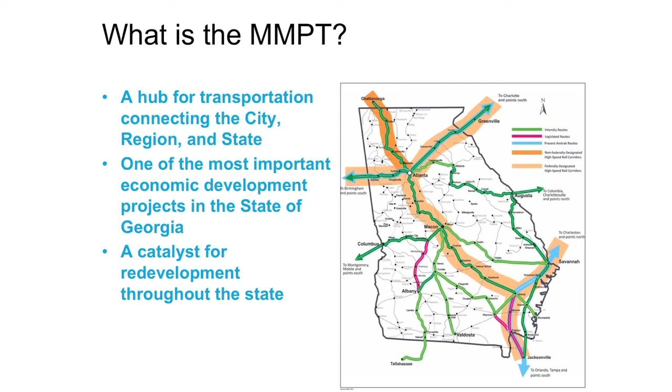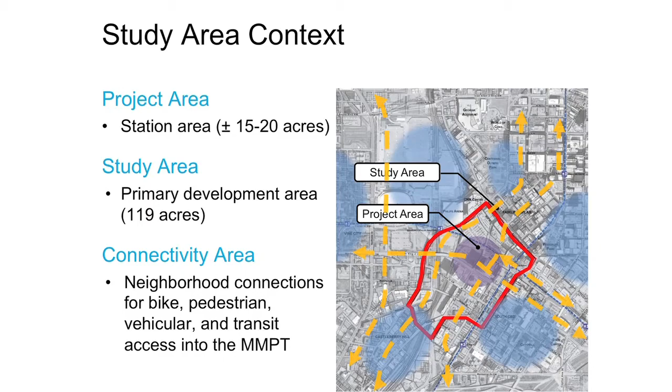The station itself, which we call the project area, sits in the middle, about 15 to 20 acres. The red area identifies 119 acres around the project. This is really about connecting the neighborhoods for bike, pedestrian, vehicle, and transit access to the MMPT.

It's really a public-private partnership with GDOT. The one thing I think is important about this project is that all the master developers don't have a stake in the game. In other words, we don't have equity into this, so our goal is to really look out for the stakeholders and work with the public to come up with the best project that we can.

So it's an agreement between us, a government agency, and a private business to expedite jobs and make them happen quicker. Some of the advantages that come out of this is that the NEPA process, for example, can take up to 5 years. Because of the relationship we've had, we're going to be able to cut that process down to less than 2 years. Timing kills deals, and it's a good thing to move projects along. So we see this project moving along very quickly.

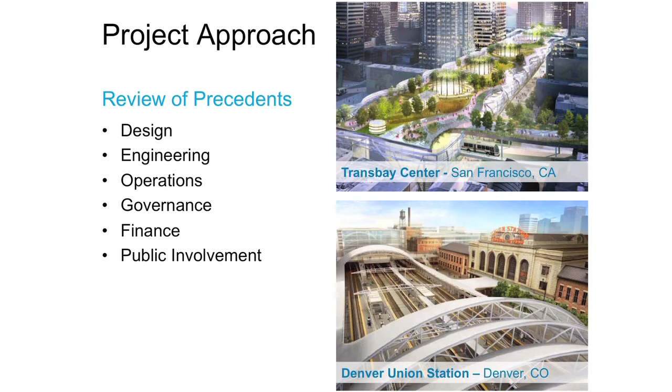In order to start this project, we actually went out and did a study of all the stations we could find that related to this project. We looked at design, engineering, operations, governance structures, finance structures, and public involvement—how do we deal with the public, the stakeholders, and everybody else? To do that, we made sure we hired what we think is one of the best firms around, Urban Collage. With that, I'm going to turn it back over to Dennis to tell you about some of his stuff.

I want to give a little bit of background. I know some folks have seen this before. I want to talk about the history, mainly because what we want to communicate is that we're not reinventing a wheel. We are not trying to put something in place in Atlanta that has never happened before—there is a history of rail, not just freight rail, but also passenger rail in Atlanta. Most folks realize the nexus of 3 rail lines was the genesis of Atlanta. It's how you got the great colliding street grids.

But what a lot of folks don't realize, unless you're a real fan of preservation or old photographs, is how many streetcars there were and how much passenger rail was involved as well. That went on for quite some time. We even had large historic terminals that we don't have anymore. This was really a rail city in every sense of the word—freight, passenger, streetcar. It was connected by transit. It was very well plugged in.

But from 1900, a little later on, as the automobile began to come into more prominence, our rail heritage from the passenger side started to get whittled away and peeled back. The freight rail obviously remained and flourished, but the passenger side started to disappear. So we're looking at ways to reestablish that.

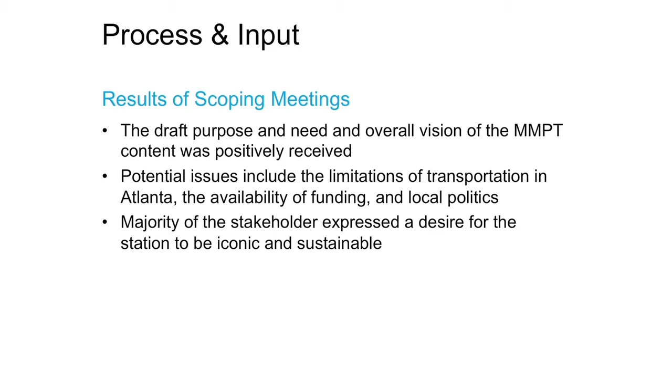As far as the station itself goes, most folks had a very consistent comment. They wanted it to be iconic, something big, something visible, something you could have a postcard of. And they wanted it to be sustainable, from a variety of standpoints, whether energy efficiency or something that enhanced the overall transportation network and encouraged transportation sustainability within Atlanta and throughout the state of Georgia.

From all that we've heard, all the studying we've done, and all the existing conditions we've looked at, there are really a series of planning goals we want to get. Whatever happens out of this, there are certain things we want to address. The folks who follow me, the technical folks who have the expertise in designing stations, rail, and surface transportation, are going to talk about these in more detail.

Rob Ross is going to be first. He's with Kimley Horn and knows surface transportation very well. He'll talk about the buses and pedestrians and how this all connects, not just within the study area but beyond it. We know there are connections that have to be dealt with into the MMPT study area, not just within it. He'll talk about enhancing and promoting the bus experience, creating a great pedestrian environment, and weaving connections both north to south and east to west so that you don't have this literal gulch anymore—you have a re-knitted fabric within downtown.

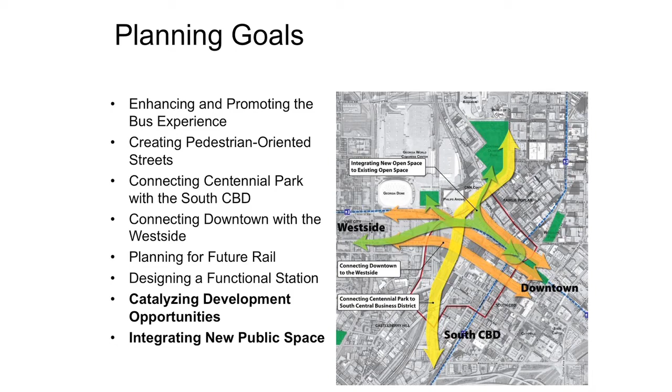Ed Campbell of Parsons Brinckerhoff is going to follow him. He'll talk more about the technical details of the rail, how we plan for future rail—not just passenger, but also freight, all forms of rail—and what goes into designing a functional station. He'll be followed by the architect John Schuyler, who's with us, who's going to talk about what these alternatives look like, how they catalyze development opportunities, and how we integrate new public space.

So with that, I'm going to turn it over to Rob Ross, who's going to talk with you about surface transportation and access. Again, Rob Ross with Kimley Horn. We're responsible for the surface transportation around the site and the infrastructure surrounding the project area. One of the first things we wanted to look at for the design of the MMPT is how the buses are going to get to and from the station itself. There are going to be a lot of buses that access this.

Gwinnett County Transit, GRTA, Cobb County Transit all have significant bus ridership into downtown and want to make sure they can get here easily. We see the interstates are obviously the best access from those places far away, particularly the HOV lanes, since these buses are going to want that quick HOV access to downtown.

There's a lot of ways to get to downtown from the region. Some of the interchanges are better than others. I'm sure all of y'all have your own opinion on the best way to get downtown, and we've found that during this process. Some of the roads and connections are better than others, but they don't always match up.

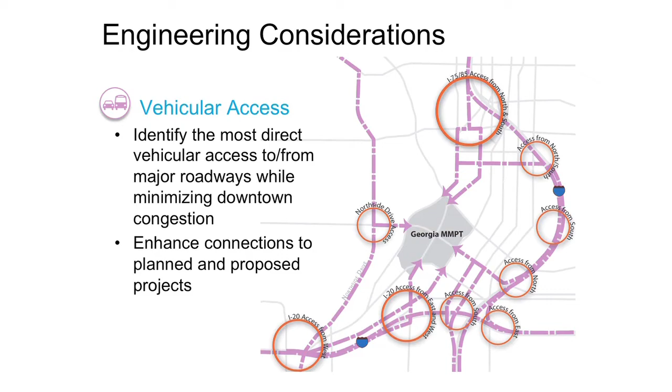One of the things we wanted to make sure we did was design a flexible site, a station with multiple access points that can change over time as GDOT comes in and implements managed lanes on I-20 or through the connector. This terminal station itself can change with that.

Buses are very important, but cars are going to be important as well. One of the goals of this is to get more people to ride transit, but not everybody is going to have access to transit, not everybody can ride it, not everybody's going to choose to ride it. So we want to make sure that cars can get to and from the station as well.

There's going to be a significant amount of overbuild. There's development that's going to occur near the station. Jim mentioned earlier the public-private partnership—that development is going to help pay for the station. So we want to make it an attractive development near here as well, so those folks who choose to drive can drive as well.

There's a lot of parking on this site today, and a lot of that parking is going to be impacted. Previous studies have shown there's an oversupply of parking, so we're probably not going to rebuild every space that's impacted, but we do want to make sure the people who choose to drive are going to have a place to park.

Grid connections: the Gulch is a hole right now. It's not an easy place to get around. Improving the east-west connectivity across the site is important.

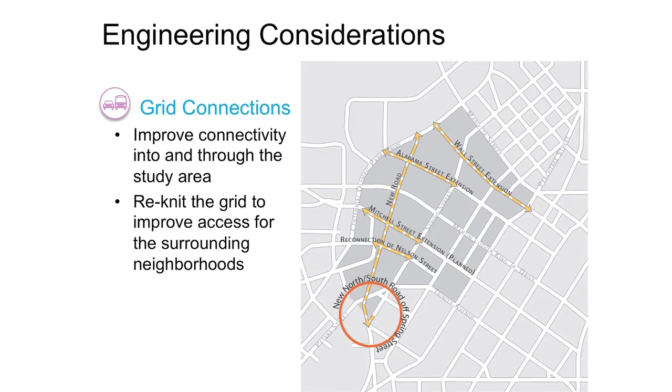We've introduced two new east-west connections, Wall Street and Alabama Street, on the north side of the site, and we've also added a new north-south connection. A lot of folks experience congestion on Spring Street on the south end of the site—that's congested almost every day, and with future development that would get worse. So we're proposing a new north-south connection parallel to Spring Street to relieve that, and also to break up those blocks, because the blocks down here are pretty big and make it hard to get around.

Pedestrian and bike connectivity—can't emphasize enough how important pedestrian and bike access is to this. It's transit: when people get off the transit here or get on the transit, they're going to have to walk or get on their bike. That's how they're going to get to their destination. So we want to make sure that it's easy to get around.

With the improved grid network, we're going to make all of these streets complete streets. We want to make them all very attractive for pedestrians and for bikes, but we don't want them congested with cars either.

The pedestrian connection is important for the development and for that TOD, the transit-oriented development. It's also important to make a good connection to Five Points, since we might not be directly connected with Five Points—we may have to walk a little bit to get there. So we want to make it a very attractive, short connection for those pedestrians.

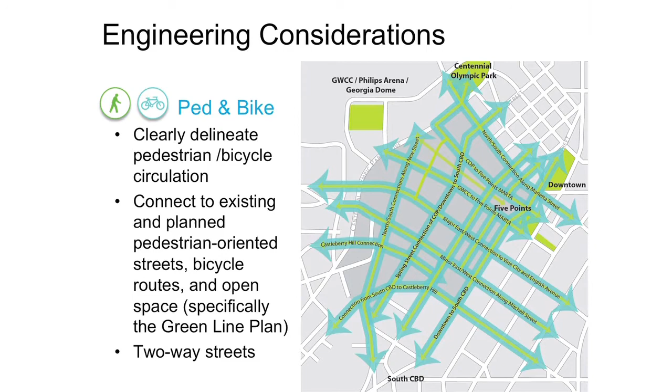And then lastly, we want to have good connections with the event space—Philips Arena, the World Congress Center, the Georgia Dome. We want good pedestrian connectivity there to encourage those folks, when they come downtown for an event, to use this station, to use the transit, and increase that transit ridership.

Next, Ed Campbell's going to speak with Parsons Brinckerhoff. They've got over 100 years of transit experience, a lot of rail and programming.

Okay, Rob talked about access to the MMPT. Let's talk a little bit about the MMPT and the program overall, and how to integrate all those different modes that are shown at the bottom of the slide.

It's really about the experience of the passenger. As you come to the MMPT, whether a loved one drops you off at a kiss-and-ride, whether you ride by streetcar, pick up a ride to the airport, go to one of the development venues that may be integrated into the station, or grab MARTA—either on a commute or during intercity travel—it's about the functionality of the entire station and integrating that experience, so that the time you depart or debark from one of your transit vehicles, your interconnection to the other mode of transportation is very efficient and comfortable.

So let's talk about the individual components that are within the MMPT. And the first one we're going to talk about is freight rail.

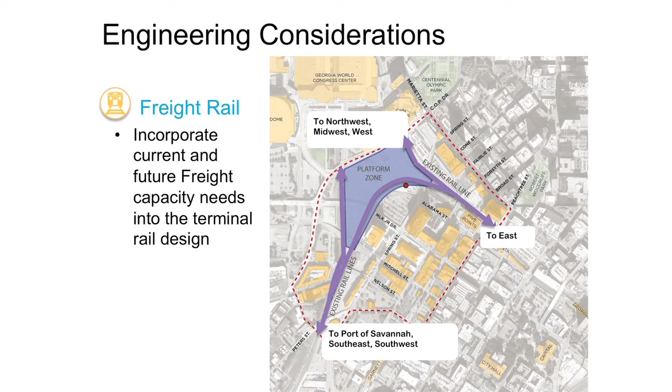The State of Georgia views and recognizes the economic benefit of freight rail. Consider the investment in the port in Savannah, and also think about our own selves, our clothing, the products we buy, the raw materials that lay the basis for the electricity you see in this building and in our homes. Freight is an important part of economic development.

The MMPT station site is located right in the middle of active freight lines. Our project approach provides a clear path for freight through the site to ensure not only efficient movement, long-term efficient movement of freight, but also to respect the growth anticipated not only from population growth in the Southeast, but the resulting growth of freight. So freight is segregated from any aspect of the MMPT station, but focused on that long-term efficient delivery in terms of anticipated increases.

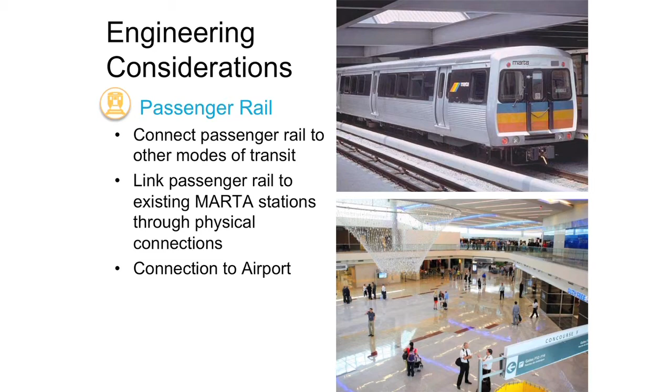Passenger rail. Georgia has underway several feasibility studies, as well as advancing into some environmental reviews of passenger rail. The MMPT has 5 platforms. The site is actually maxed out with 5 platforms to accommodate those passenger rail services should they occur in the future.

The entire focus of the station, as you'll see in the concepts that follow, is generally located between the MARTA 5-Points station, a major hub of the MARTA network providing access north-south and east-west. It's important to have direct connectivity. The MMPT will have direct connectivity to MARTA's 5-Points station, but also the Georgia Dome station to the west.

And finally, when it comes to the airport, when you arrive at the MMPT you'll have multiple options, whether it's by bus, by MARTA, by shuttle, by taxi, or even potentially passenger rail in the future, to access the international and domestic terminals of the airport.

The MMPT project is also going to be integrated with the streetcar. Currently, the City of Atlanta is underway with the implementation of a streetcar network. We're coordinating with the Atlanta BeltLine, who has responsibility for that implementation.

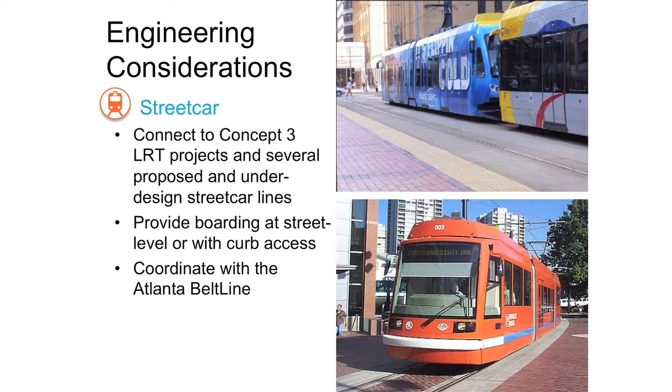Streetcars provide that last-mile connectivity, somewhat like a moving sidewalk, that gets you to your final destination, whether you're arriving at the terminal or the multimodal passenger station and going to a business, your residence, a hotel, or a restaurant. The MMPT will have platforms, and because of the activity we anticipate, the platforms will accommodate several streetcars at one time with level boarding and curb access.

Buses, and boy, do we have lots of buses at the MMPT. When you look at Atlanta, our principal mode of transportation besides the MARTA heavy rail line is bus. We anticipate long-term growth of bus requiring roughly 80 bays within the facility.

Think about that in terms of the number of buses it takes off the local street grid—you're talking about hundreds of buses. Those that will use the MMPT include local MARTA buses, regional express commuter buses from the various counties and GRTA, intercity buses which are currently growing somewhat explosively, future BRT bus rapid transit with articulated vehicle designs, and some current buses today are double-decker buses that serve intercity routes.

The point here is that the MMPT is poised for growth within the bus network, and I might also mention the charter bus functions could also access and use the facility.

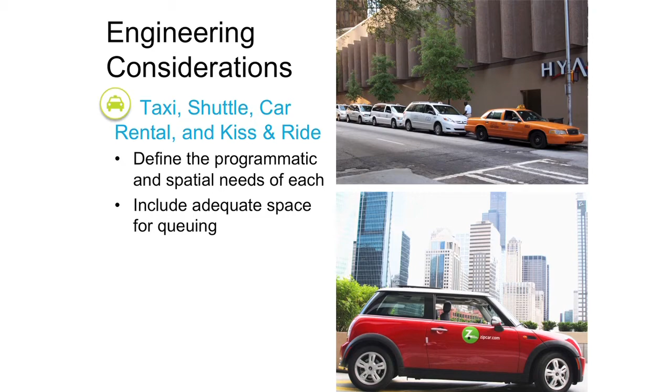Also key for any station is the ability to drop off quickly a loved one, either via kiss-and-ride, a shuttle to interface with the station to take you to the central business district and/or hotel, and of course taxis. The MMPT station has adequate queuing for all those different local modes of transportation. In addition, car rental will be available within and integrated into the station.

Pedestrian bike access - Rob talked about how important pedestrian flow is to the station. The station concepts ensure that grid, with east-west flow through the station as well as north-south flow through the station.

In addition, bicycles will be provided with facilities not only to store bikes, but potentially rent bikes and repair bikes. The key to all of these modes of transportation serving the MMPT, and the customer experience through the station, is that the MMPT is an accessible design meeting ADA requirements, whether it's a mode or the station itself.

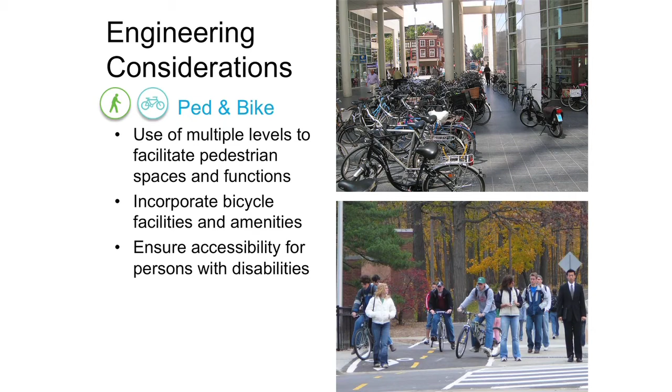With this, I'd like to pass it on to John Schuyler, who will present the alternatives. Before we get into the actual details of the design, we'd like to give you a brief tour of some of the qualities that we think constitute a great transportation center, and a very brief tour of the site itself to give you a sense of the context.

So we want to talk to you about the great qualities of a transportation center to give you a sense of the tremendous opportunity that this project has. I think by looking at these images, you'll get a sense about the potential here.

Transportation centers are big, complex buildings with very demanding technical requirements. But in addition to meeting the technical requirements, we think the best transportation centers have these qualities in common: a very strong civic presence, clarity and legibility in how they're organized, a great main hall, vibrancy, convenience to use, and last but not least, they're forward-thinking.

I should point out that the qualities we're talking about today are aspirational. We're going to show you some very preliminary images, and these qualities won't be fully realized in those images, but we wanted to give you a sense of where we're heading and share what we're working on.

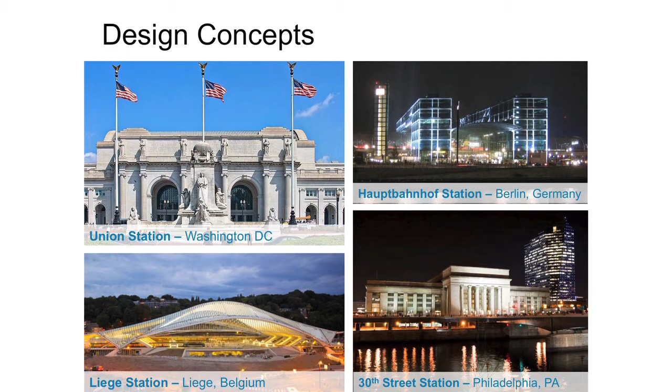Civic presence - these buildings are great transportation centers that all contain a very strong sense of civic presence. They have a very important role in their communities, in the fabric of their cities and their region. They become landmarks.

It's essential for a successful transportation center to have a very simple, clear organization so that it's easy to use for both first-time users and repeat users. It makes them safe and accessible.

The heart of every great transportation center is a main hall. These are great public spaces, rooms that are shared and part of the community. There's a sense of movement, a sense of activity, a sense of arrival.

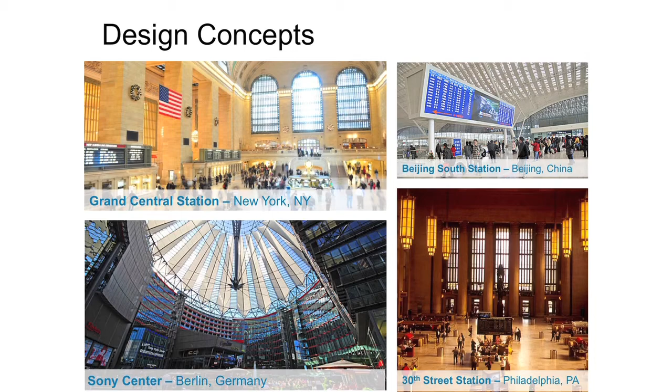It's worth noting that some of the older stations were originally focused primarily on transportation themselves, and they could be great rooms, no doubt about it, but they could be a little static. Over time, these spaces have been renovated and they're much more dynamic. I think what the team is doing is learning lessons from the great older stations and incorporating that into the dynamism of the new contemporary stations.

As I was just mentioning, transportation centers today are not just about transportation. They're also about great activities. They have a lot of retail in them, there's often dining activities, and they become destinations in and of themselves - an extension of the user's daily life and an extension of the community in which they're placed.

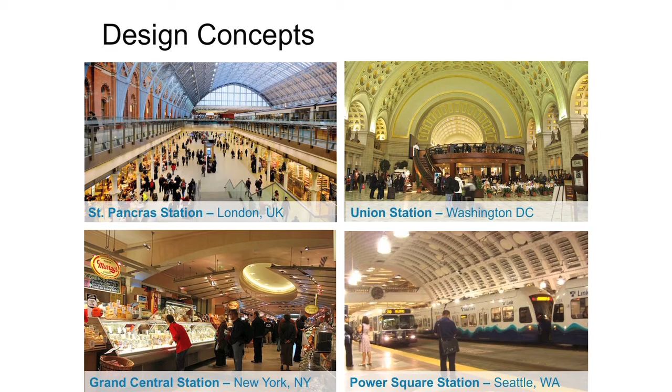The best transportation centers are also forward-thinking. There's an aspirational quality about them. They represent the best of their societies.

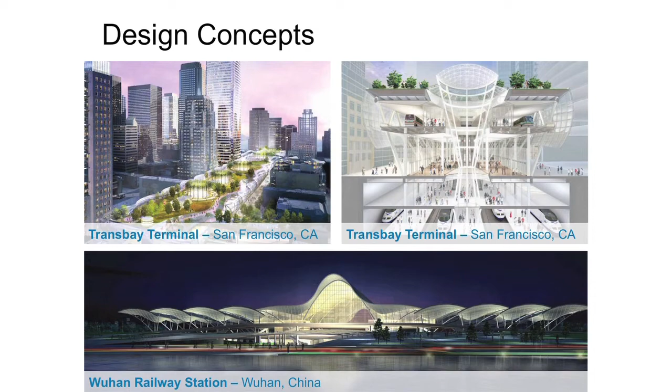All transportation centers are sustainable in that they support the public use of transportation, and they lower our energy consumption. But the best transportation centers today are also high-performance buildings themselves - through their design and engineering, there's often something heroic about these buildings as they look towards the future.

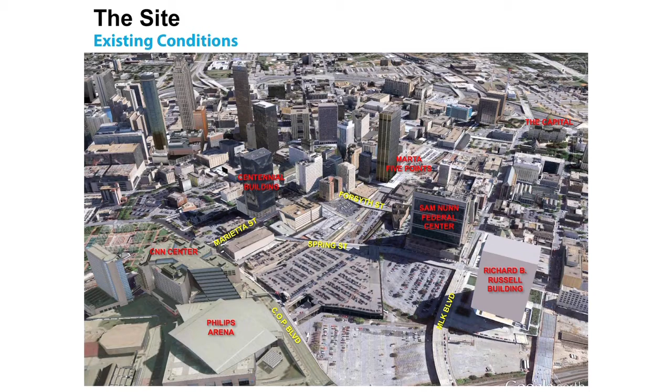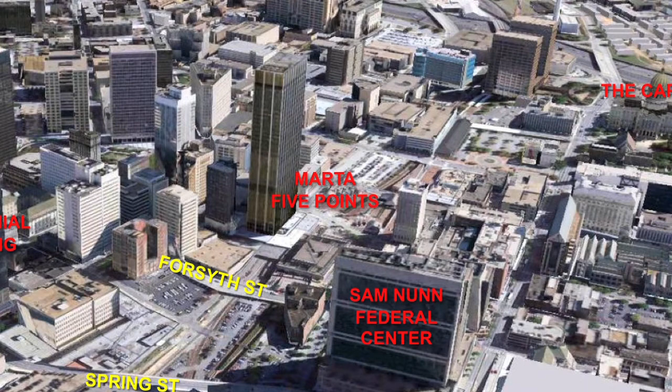So, coming back to our site itself, we're back into Atlanta now. This is an aerial view of our site, and we'll be looking at options that fall in this area right here. Just to help you with orientation, this is the Philips Arena in the foreground, the CNN Center, MARTA 5 Points, the Sam Nunn Federal Center, the Richard Russell Building.

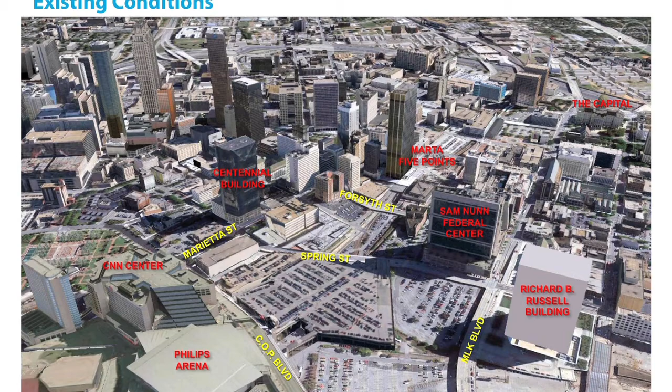This is Centennial Olympic Park Boulevard, this is Spring Street, Forsyth, and Peachtree would just be to the east of MARTA 5 Points, and that's Martin Luther King Jr. Boulevard.

All the options that we're going to be showing you today are really based on combinations of 3 blocks. It's important to understand how we arrived at those 3 blocks.

Ed Campbell was talking about the importance of the rail platforms and where they're going to be located. They're generally in this location. It's important for the station itself to be located immediately above those platforms so that there's direct access to it.

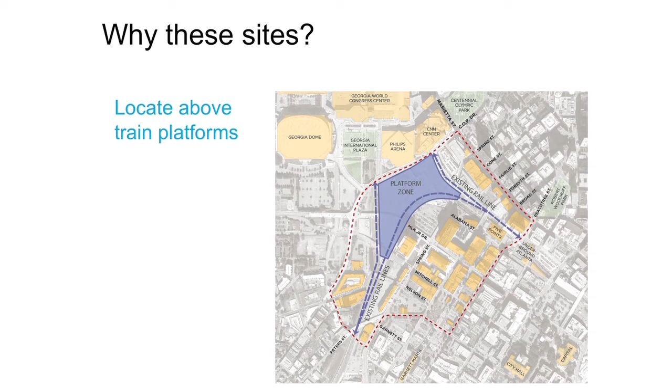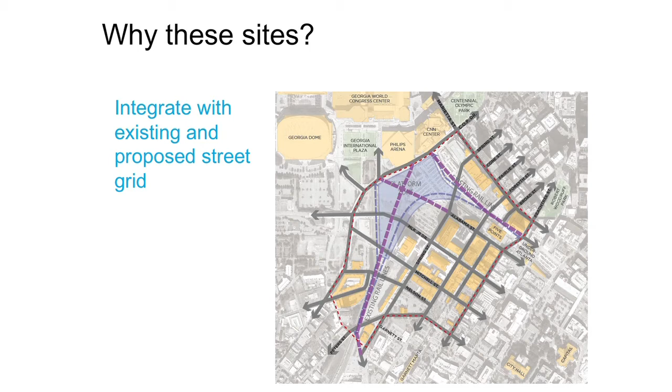Rob Ross was talking about the street network and how important it is for it to integrate with both the existing and the proposed street network. There's an optimum size of block that allows for both pedestrian and vehicular connectivity, and that's generally what's setting this overall street grid.

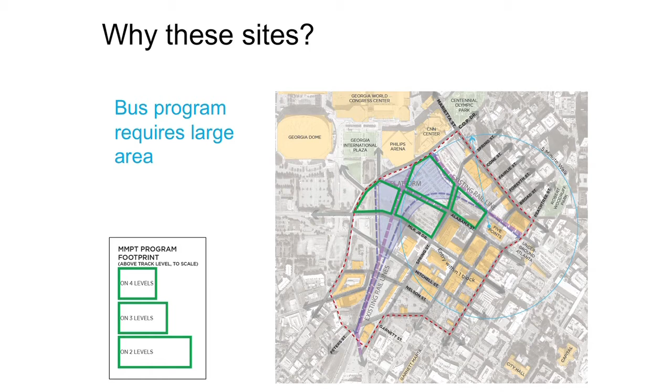One thing that we think is very important is that there be a very close pedestrian connection between the MARTA station and the MMPT. The diagrams on the lower left-hand side of the slide show the footprint of that program in different configurations. This is the entire program on 2 levels, 3 levels, and 4 levels, drawn at the same scale as the site plan. So we'll be looking at various combinations of those blocks to accommodate various combinations of heights and floors of the program.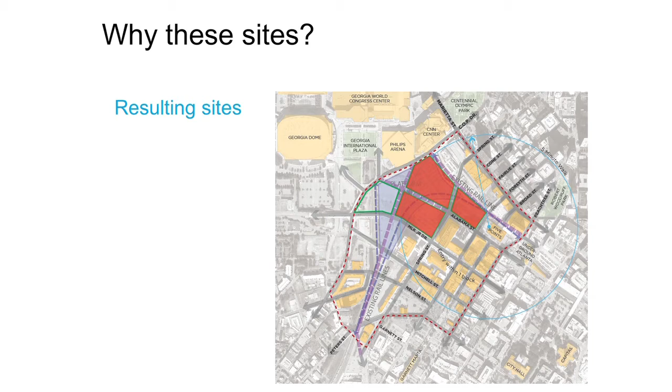When you take all those criteria together, it really yields these 3 blocks, which are going to form the basis for the 3 options that we're going to be looking at in various combinations.

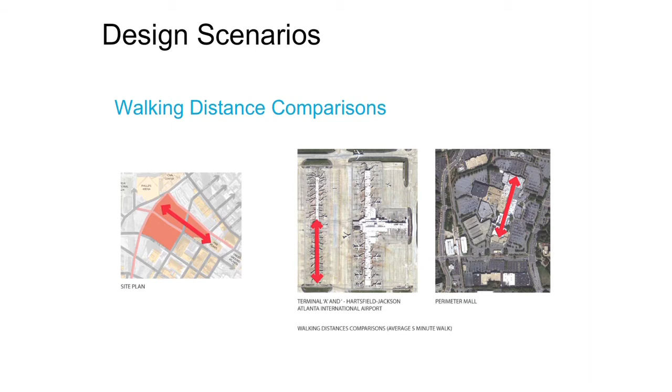I just want to touch again on this issue of walking distance, because it's so important to understand how this feels as you move from MARTA 5 Points to the station itself. For comparison purposes, this is our site, and these are 2 examples you might be familiar with from the local area. This is the site showing MARTA 5 Points with the red arrow, which represents a 5-minute walk across those 3 blocks. This is the Atlanta Airport Terminal with the red arrow, which is the 5-minute walk, on one of the typical terminals - really half of one of the regular terminals at the airport, just to give you a sense of it.

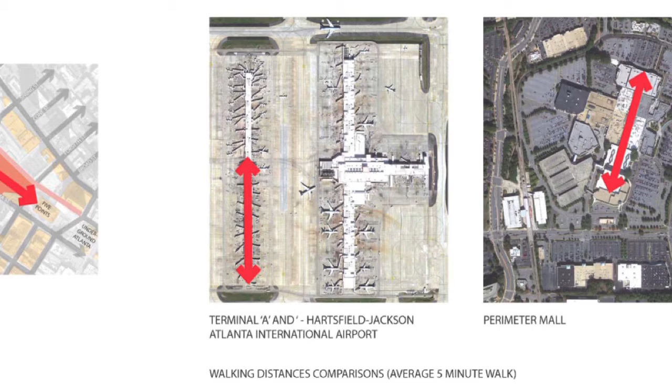This is the Perimeter Mall in Atlanta. Most malls are also about the size, so if you don't know this one, they're all about the same. Generally, what we find is that the distance from the one anchor to the other anchor is about a 5-minute walk.

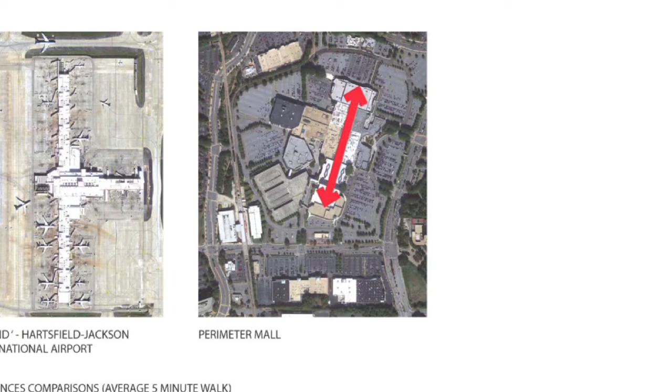Just to recap the overall program, both Rob and Ed talked about the overall program between the buses and the transportation, but in addition, we're going to be talking about the importance of the potential for development above and adjacent to the terminal itself.

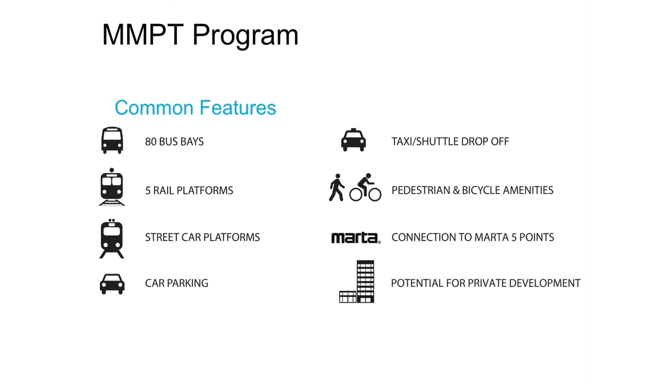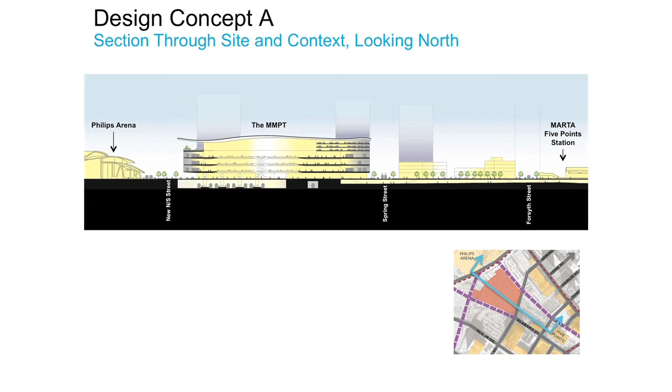This is a section through the site. So if you look at the drawing on the lower right-hand side, this is a site plan. Imagine you were to cut through the site this way, remove this portion of the site, and look to the north.

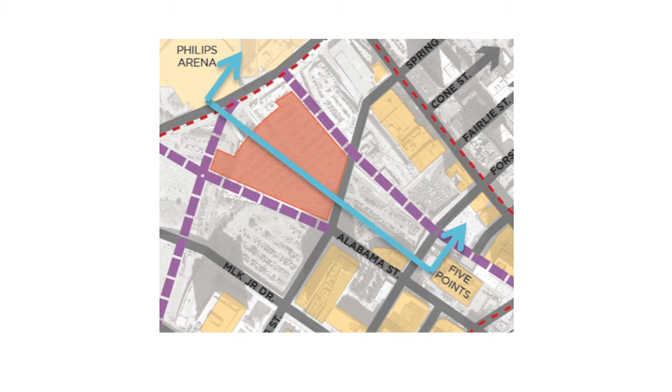What you would see is you'd see the Philips Arena on the left. This is the new North-South Street. This is the main MMPT itself with its main hall. Spring Street, the connecting block, MARTA 5 Point Station.

It's important to point out that there are 2 opportunities for connecting between MARTA 5 Points and the MMPT. There's both a pedestrian connection that can be at street level, or there's the opportunity for a direct connection below street level that would be ADA accessible. There are also many opportunities to bring down additional light and air into that connecting concourse. So there's multiple ways to connect that building.

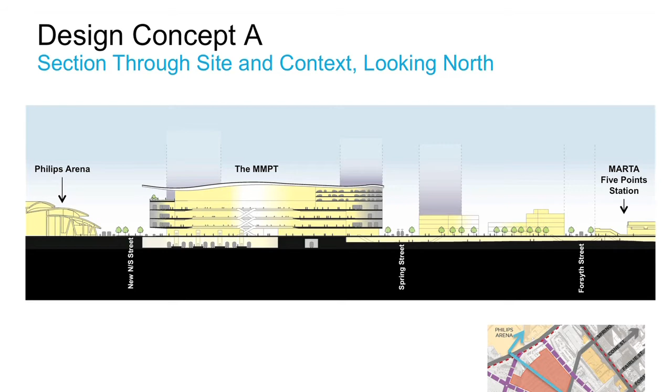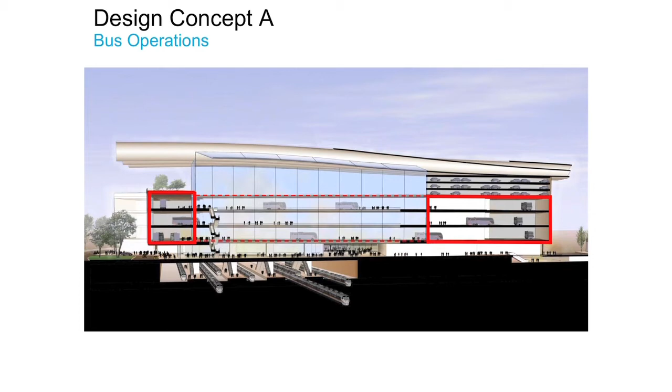A little closer in, this is the main street level and the main hall itself. The passenger rail platforms are below street level. These are 3 levels of bus above the street that are wrapping around, looping around the main hall, and structured parking above that.

Now we're going to show you a little digital fly-through of the site just to give you a sense of the orientation and the scale of the project. These are the existing conditions - again, Philips Arena - existing street network, COP, Centennial Olympic Park Drive, Martin Luther King Jr., and the proposed street grid.

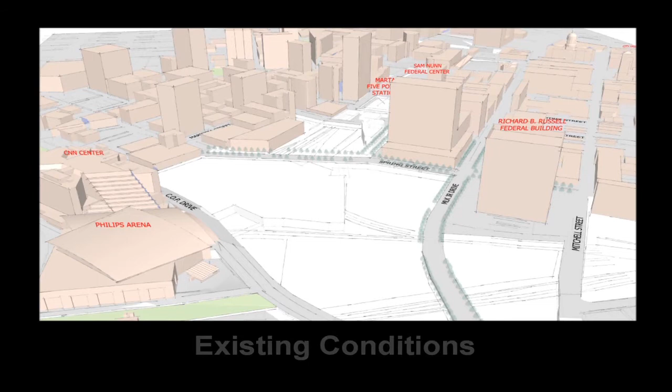This is the new north-south, this is Alabama Extension and Wall Street, and this is the MMPT for Concept A. This is the connecting block, and MARTA 5 Points in the distance.

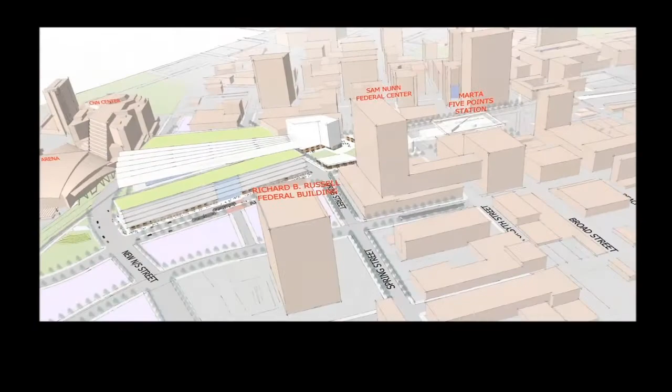This is a view from the east, looking over MARTA 5-Points Station with the connecting block, showing the opportunity for both connection through public open space, through this public and private development, and one can also connect below the street level there.

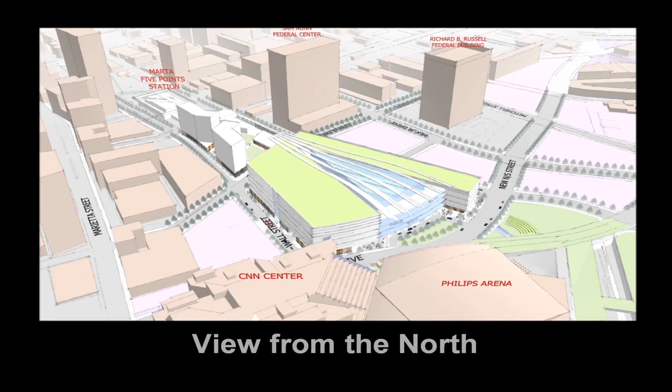Showing the Constitution. This would be the Atlanta Journal-Constitution building, which would be renovated as part of that development block.

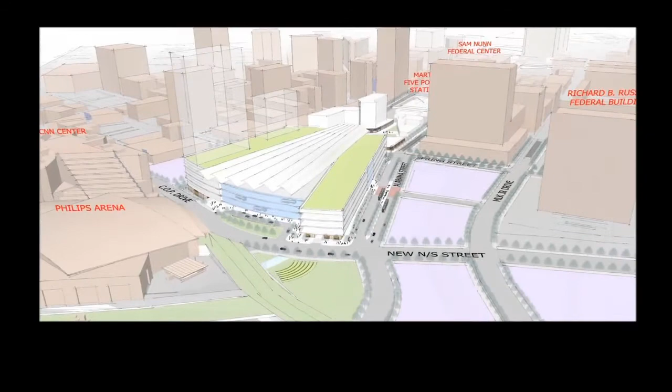This shows the opportunity for some of the potential overbuild and development, details to be worked out. As we get a little closer, this is the front door to the complex, showing the main hall with the buses circulating inside and over the space.

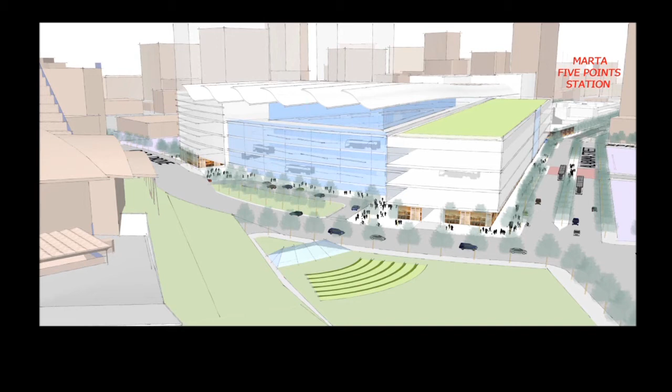This shows the streetcar on Alabama and continuous retail at street level on both Alabama and Wall Street.

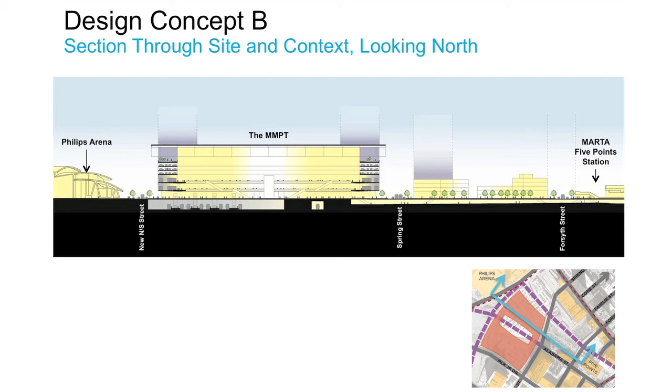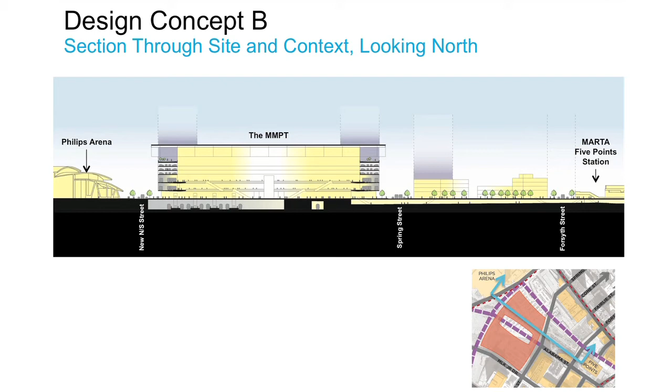Again, the section: if you imagine you were cutting through Alabama, you remove this portion of the site and look to the north, what you would see is Philips Arena on the left, this is the new north-south street, and this is Alabama that we're cutting through with the MMPT, the main hall, the connecting block, and MARTA 5-Points Station. Again, there are two means of connecting for pedestrians between MARTA 5 Points and the MMPT, both above street level and below street level.

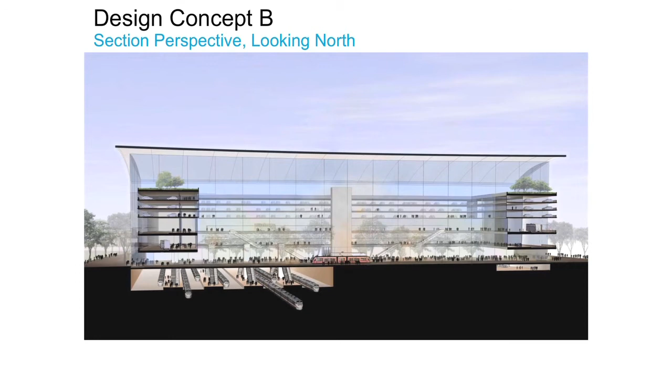A little closer in again. This is Alabama with the streetcar stop in the middle, and this is the main passenger hall behind it, with passenger rail below street level, two levels of bus above looping around behind the two main halls, with structured parking above.

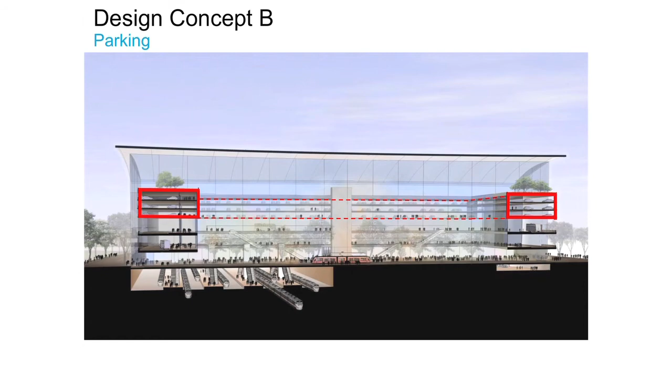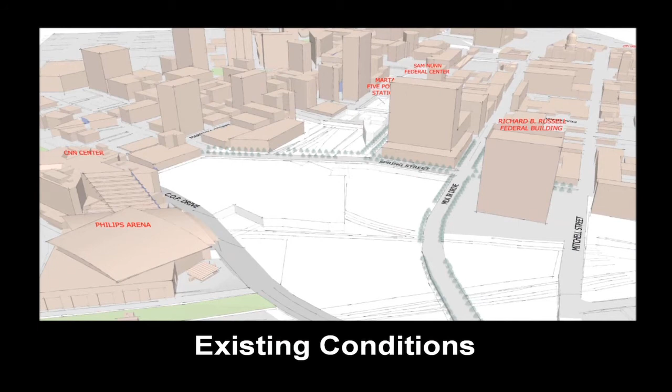Again, existing conditions: Martin Luther King, existing COP, proposed street network. This is Alabama coming through, Wall Street coming through, and the new north-south street.

The MMPT itself on two blocks, embracing Alabama Street with an indoor-outdoor space, the main halls connected to that outdoor space, an extension of it.

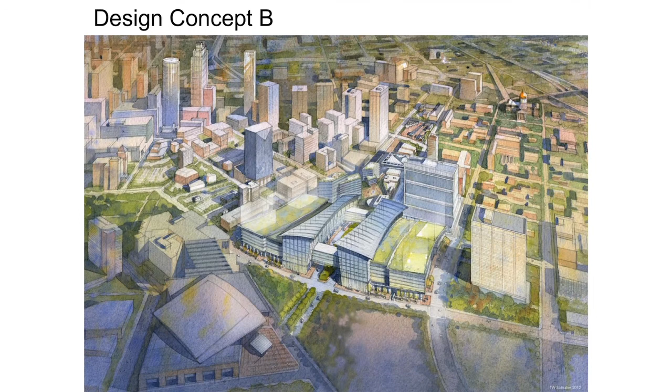I'm probably going to repeat this a couple times, but it's important to underscore again that these are very preliminary images. What's essential here is the fundamental characteristics of the schemes, not the specific details of whether it's glass or not glass, or roof shapes. Those are really secondary considerations at this time and are very likely to change as we work on this over the next couple of months.

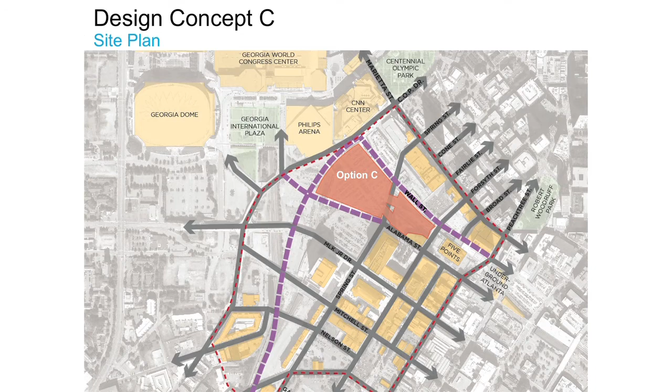So, option C. Option C is a 2-block scheme. It uses the same block that we had for option A, but extends one block to the east, across Spring Street, bringing you right to the front door of MARTA 5 Points Station. So this will have the most direct connection to MARTA 5 Points Station. It's bounded on the north by Wall Street, on the south by Alabama, on the west by the new North-South Street, again Spring, and then on the east side by Forsyth.

The overall concept for this scheme shares some common qualities as Scheme A, in that there is a main hall at the center of this block that is flanked by 2 wings, but that concept is extended to the east, where there is a secondary hall on that block. The buses will be on 1 level above the street, looping around between those 2 blocks.

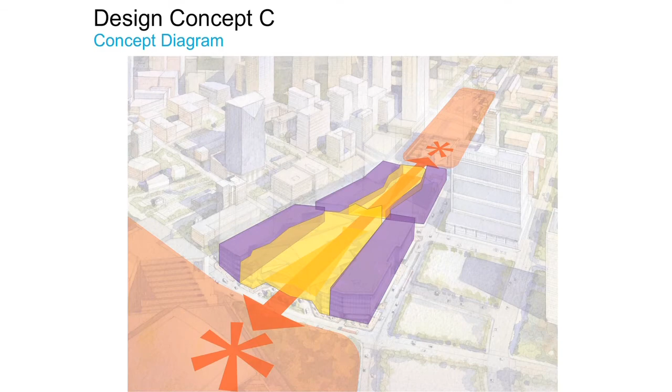There's a continuity of the scheme from the Philips Arena straight through to MARTA 5 Points Station. In this case, we're cutting through 2 blocks, removing this portion and looking to the north. The left side, you'll see the Philips Arena with the new north-south.

This is the western portion. This is Spring Street. This is the eastern portion with its secondary main hall. This is Forsyth. Directly across is MARTA 5 Points Station, again, with opportunities for direct street-level connection between the station and MARTA, and MMPT, and below-grade connection directly into the station.

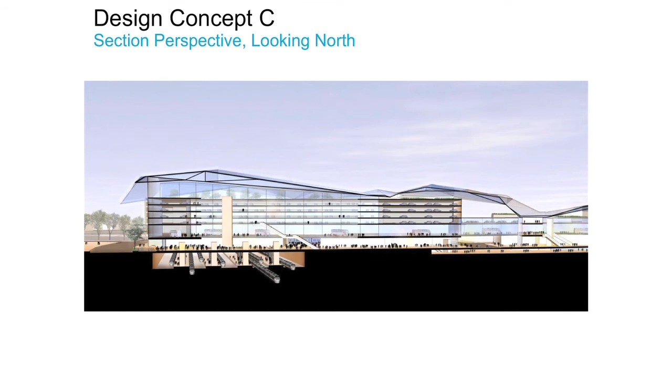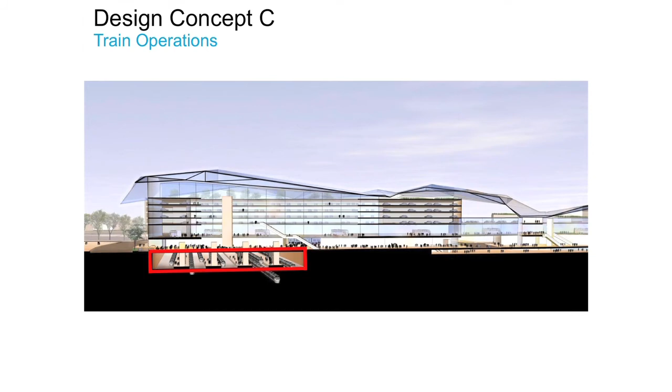A little closer in, the main street level for passengers, the primary hall, the secondary hall, passenger rail platforms below street level, 1 level of bus above street level that's looping around both halls and across both blocks with structured parking above.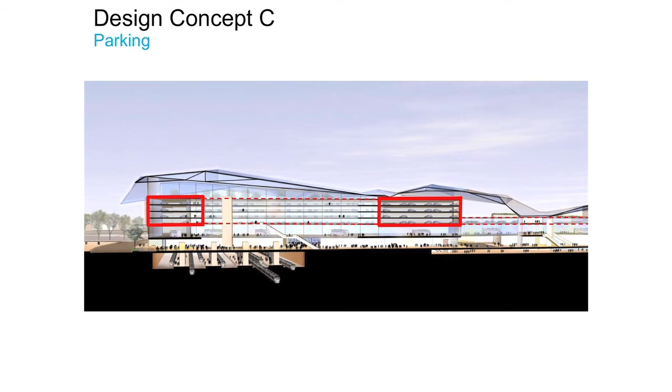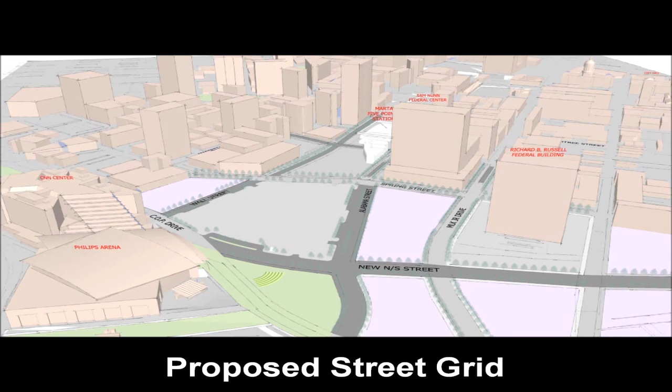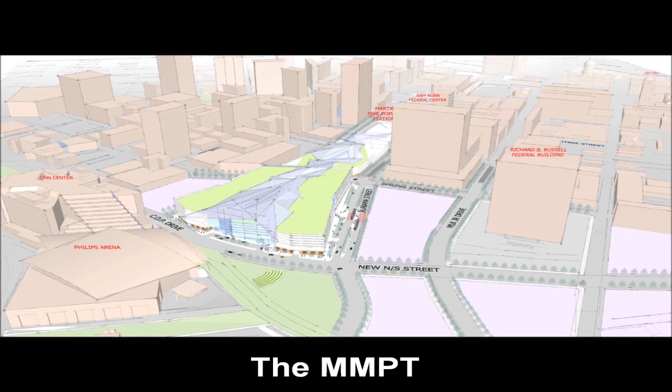So, existing conditions, Martin Luther King, COP. This is the proposed street grid with a new north-south, Alabama, Wall Street, the MMPT across 2 blocks with a main hall that continues across into a secondary hall, direct continuity between the 2 blocks for both buses and passengers.

View from over MARTA 5 Points with the main entrance into the complex directly across the street, across Forsyth from 5 Points, showing the continuity.

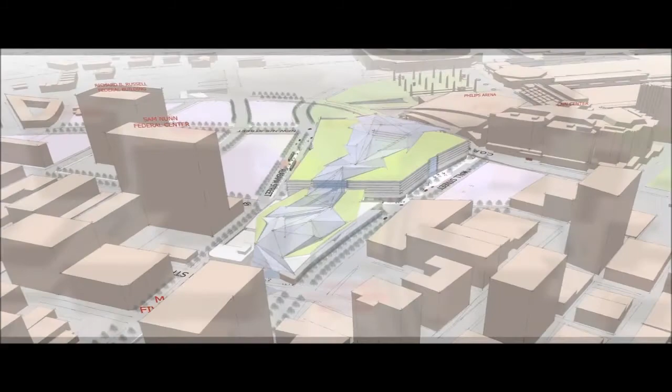There will be multiple access points to each of these stations in addition to their primary entrances. Again, opportunity for potential development above the station.

And as we get a little closer, this is the main entrance into the station, its front door, if you will, with the new north-south, street-level retail, the streetcar located on Alabama, the artist rendering.

So you've now seen the basic images for all 3 of the options. All of these options share many features in common, but there's a couple of things that we should talk about where they really are different from one another.

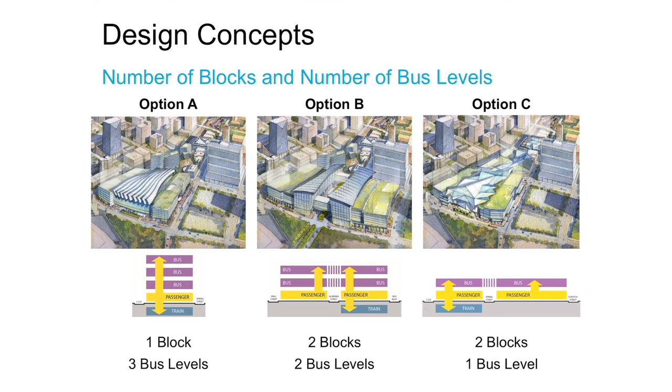So, first and foremost, option A is located on a single block. And it has its central main hall. The buses are on 3 levels above street level in this diagram.

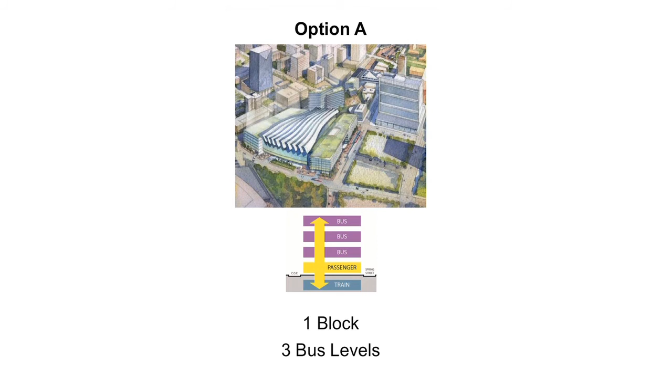Option B is on 2 blocks, straddling and embracing Alabama and coming down to Martin Luther King Jr. Boulevard. There is a central hall that is framed by Alabama and embraces the streetcar. The buses for this scheme are on 2 levels.

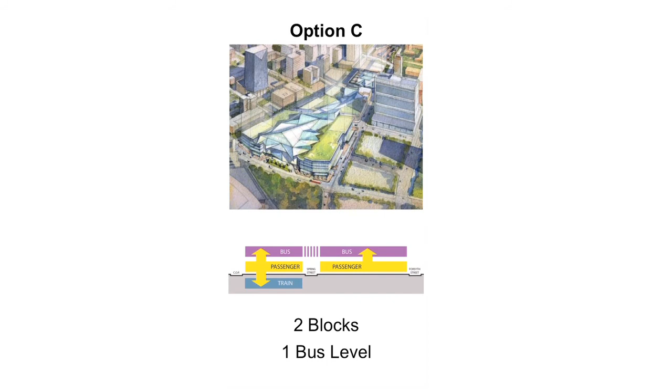Option C is also on 2 blocks, but moving east-west rather than north-south. This block and this block, providing a continuous connection between the Phillips Arena and the activities to the west and MARTA Five Points Station. The buses for this option are located on 1 level.

A couple other differences that are worth mentioning to assist you with understanding the differences between the schemes. So, where are their front doors? In option A, the front door is on Centennial Olympic Park Drive or the new north-south road. On option B, it'll be located on Alabama itself in this area. And in option C, it is also on the new north-south, facing to the west.

Option A is 1 block away, physically, from MARTA Five Points Station. Again, there's opportunities for direct connections below street level and above street level, but the building itself is 1 block away. Option B, likewise, but option C, this is where you're directly across the street from MARTA Five Points Station.

In terms of pedestrian focus, there's 2 options within A on how you can connect for the pedestrians between the east and the west. You can connect mid-block through the complex, or you can use the streets. In option B, the focus there is really much more about Alabama, and it's really supporting the east-west connections. And in option C, similar to A, there is an internal spine, but it's a continuous spine, continuous concourse that'll move from the east to the west.

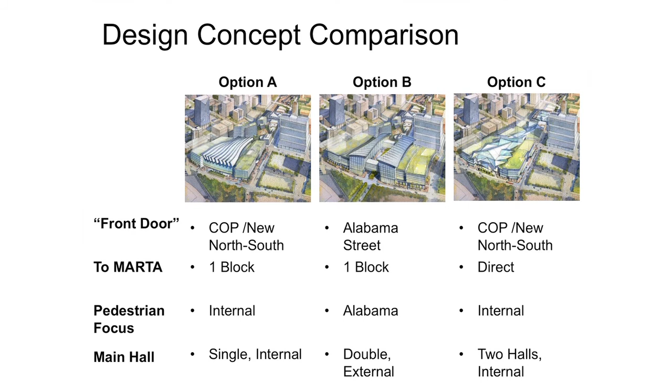There are main hall differences. In option A, it's really a single, internally focused main hall. In option B, there's a double main hall with an external focus on the street itself. And in option C, you're looking at two halls, a primary and a secondary, with a bit more of an internal focus to them. So with that, I've talked about the overall station itself and the basic options.

Now I'm going to hand it back to Jim Richardson, and he's going to talk to you, and Ed Campbell, and they're going to talk a little bit more about some of the opportunities and impacts for the station itself and its relationship to the state of Georgia.

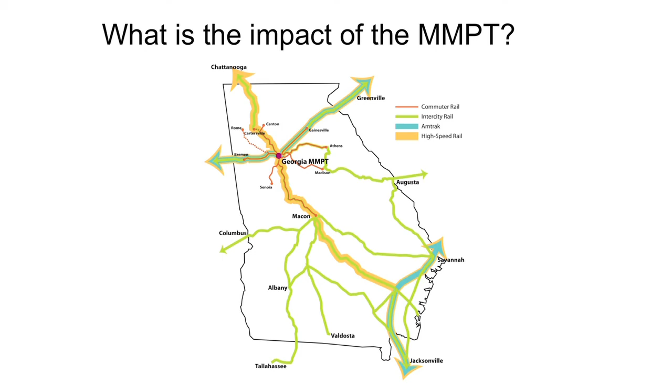One of the important things is once we get this MMPT station built, is how do we connect to Georgia? That's what Ed's going to go through in a minute. But what I'd like to emphasize is the importance of freight. Ed talked earlier about how we're going to work with NS and CSX about coordinating freight through the city of Atlanta without disrupting any of their capacities now and in the future.

That same circumstance occurs at the state level, we have to look outside the state too as we connect and add lines. We're concerned about the capacity of freight in the future and making sure we don't disrupt that across the state. Freight's been an important economic driver for the state of Georgia. We need it and we got to respect it.

One thing I like to share is that for every person out here, there's 70 tons moved per year per person for all of your goods, your clothes and everything else. Over the next 20 years there'll be another 30 to 40 million people, and you multiply that out, that's another 2 to 3 billion tons of freight that needs to be moved. So the freight line capacity needs to stay open. We need to work with them on passenger rail, and I think we're developing those relationships to do that.

And with that, I'm going to let Ed talk about how these are going to connect in the future and how we work to do this. Okay, so let's expand on what I briefly said about the current feasibility and actual environmental NEPA efforts related to passenger rail.

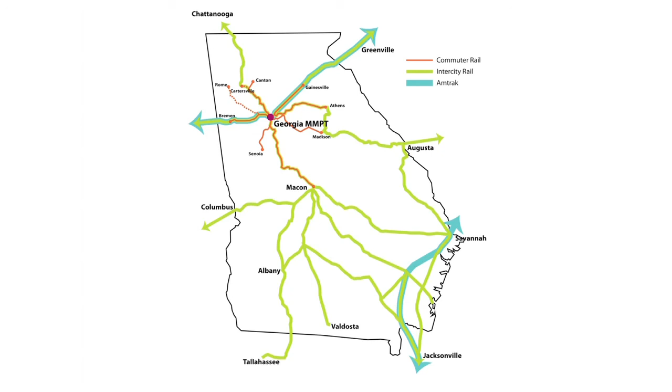Amtrak services, current operating Amtrak services - when you think about this, there are current efforts to enhance little by little those corridors where Amtrak serves, not only through coordinated efforts with the existing freight hosts, but also through station improvements. And finally, high-speed rail out in the future.

Georgia has four lines that connect to Atlanta. One that comes from the northeast and connects ultimately to Washington. One that goes north connecting eventually to Chicago potentially, but really Chattanooga and Nashville. And one that connects west to Birmingham and, of course, down to Macon and Jacksonville.

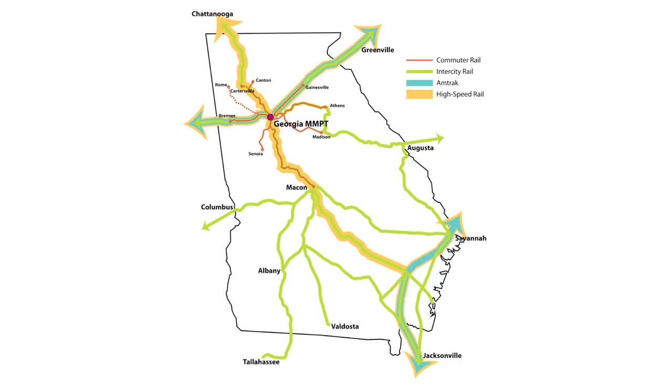This study was recently completed - a feasibility study that examined the feasibility of high-speed rail in these corridors, and considered not only the freight corridor, but also the interstate corridor and greenfield options. So when you think about high-speed rail, it's not necessarily in the freight corridor.

And with that, I'll turn it back to Dennis, I believe. The next steps for us are refining the station alternatives and eventually getting to what Jim referred to earlier, which is a preferred alternative, and that's what we would go study in more detail. We're going to continue - there's going to be at least another one of these meetings, probably several other focus group meetings, more neighborhood meetings. We're going to continue this dialogue for quite some time.